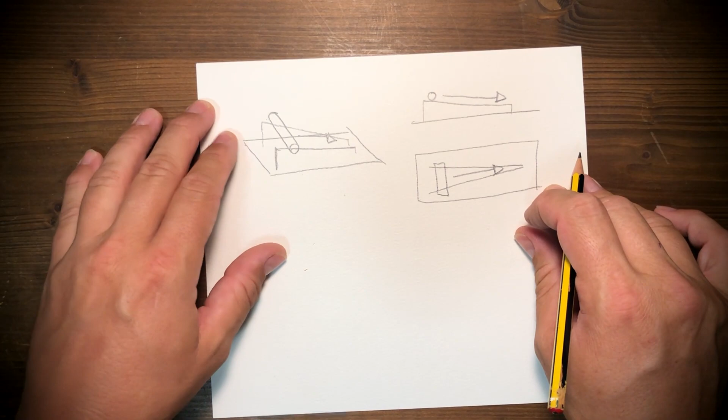The interesting part of these experiments is not when we use a cylinder, but when we compare it to another object, namely an object called a bicone.

A bicone. Now, a bicone is simply a cone which has been placed on top of another cone. It's that simple.

So if we imagine the bicone in place here, it would look something like this. And over here we could imagine it to look like that. And up here, it would probably look something like that.

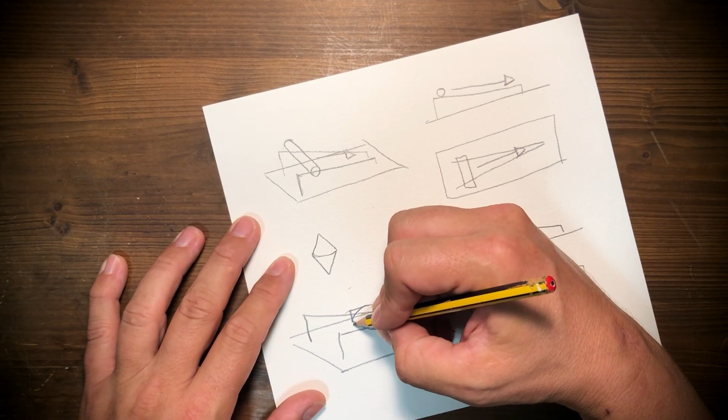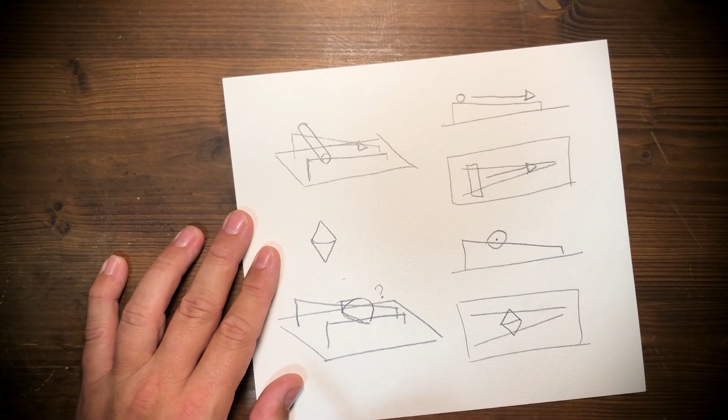Now the question is, what happens when you place the bicone on the rails? We'll come to that later. For the time being, though...

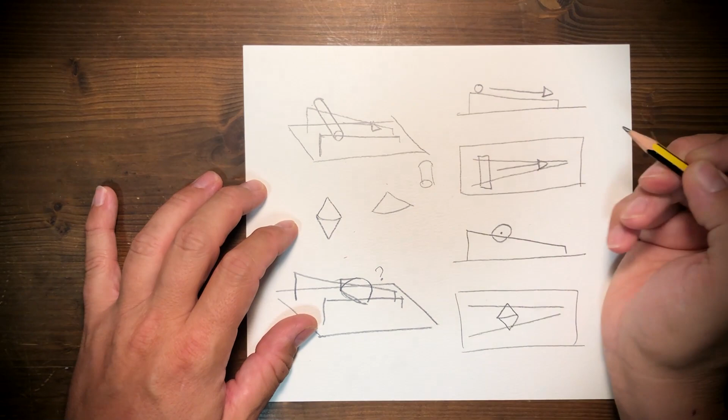Let's get to 3D modeling, and we'll build a very simple cone and a very simple cylinder, and we'll print these off with a 3D printer.

Now, for the cone, we'll have to print it in two parts and then stick them together. The reason for this is that we want to actually print a cone that has quite a wide angle.

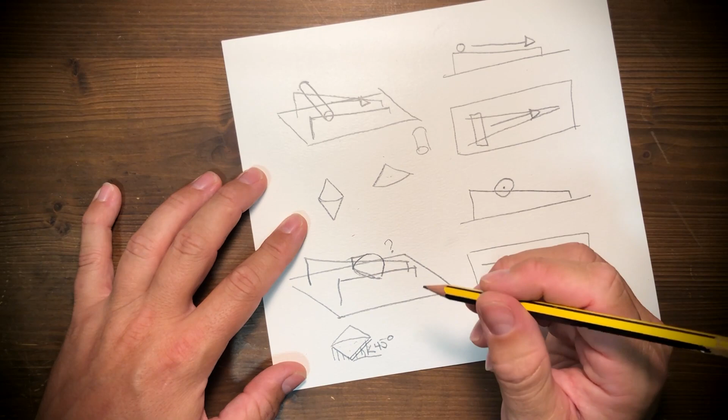And if we try to do that with a 3D printer, and this angle is less than 45 degrees, then the print will most likely fail unless we use support struts. And the support struts will create a slightly uneven surface on the print area, which will potentially ruin our experiment. So we'll print it in two pieces.

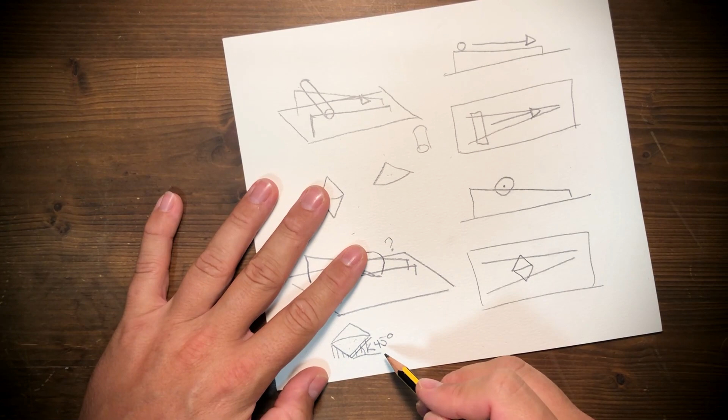The reason why you can't really print less than a 45-degree angle in this way is interesting in and of itself.

If we imagine the cross-section of filaments butting up against each other in a print surface, if you imagine these are lines of plastic that have been deposited by a print head, if you then want to, on the next layer, print an overhang, you need a minimum adherent surface of half of the previous layer. Like that, you can create an overhang that is 45 degrees. If you attempt to print further out, the contact area is so small that the filament will likely not stick, and the print will fall apart, and the whole thing will fail in a mess of PLA noodles.

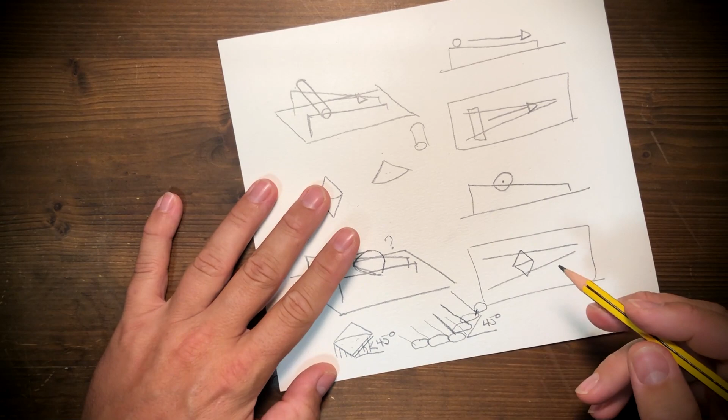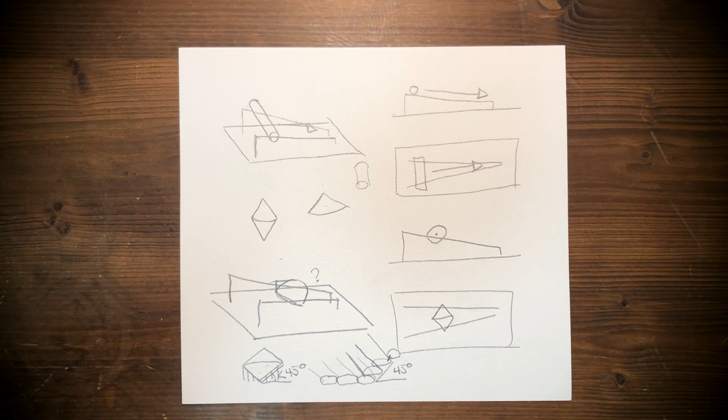So we'll move this into the virtual space now and make a couple of models on the computer. The first thing I'm going to do is, using Fusion 360, make a little sketch of a right-angled triangle.

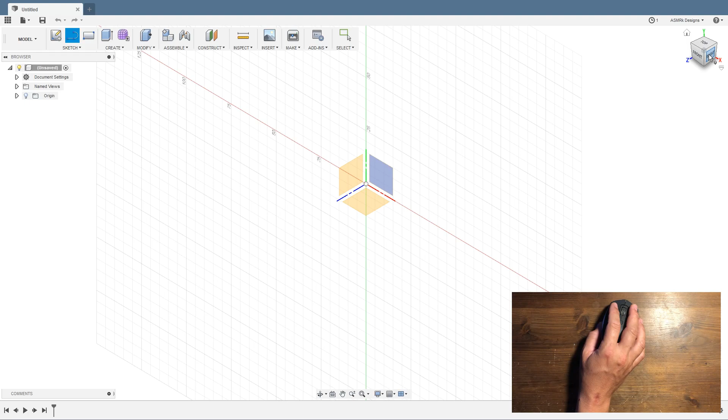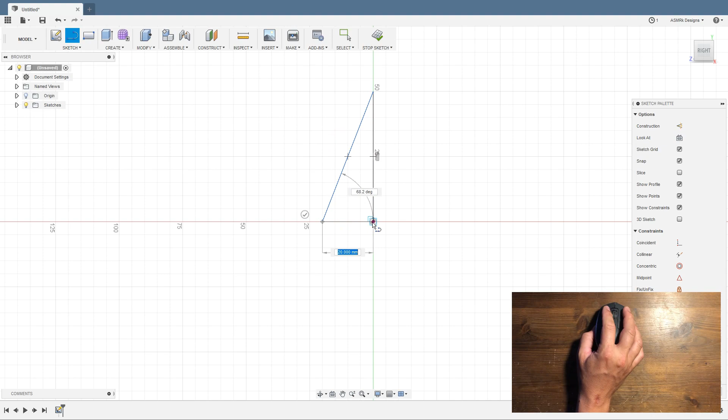We're going to make the sketch on the XZ plane. That'll simplify 3D printing later. So we'll just start by sketching out a very basic shape here. You can see we now have a simple right-angled triangle.

What we'll do now is we'll define some dimensions. We select this side, and our build volume is somewhere in the region of 20 centimeters. As we're actually going to rotate this shape around, we only want this side to be about 10 centimeters, so we'll put in 100 millimeters.

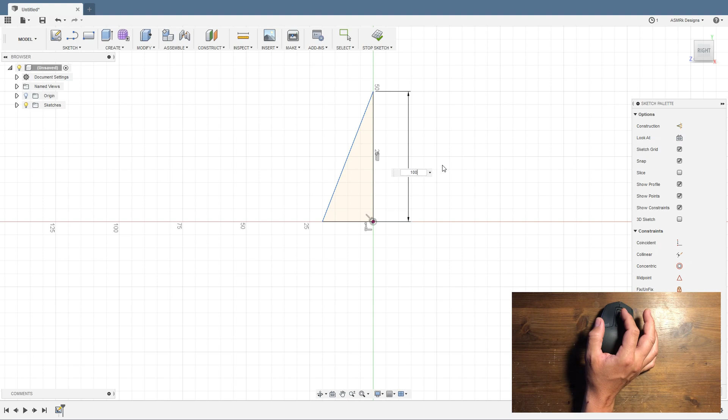We'll also want to define the height of our cone, using this axis here. Now 40 millimeters actually seems like a pretty reasonable size to me. We can always come back and modify that later, so let's just stick to 40 for the time being.

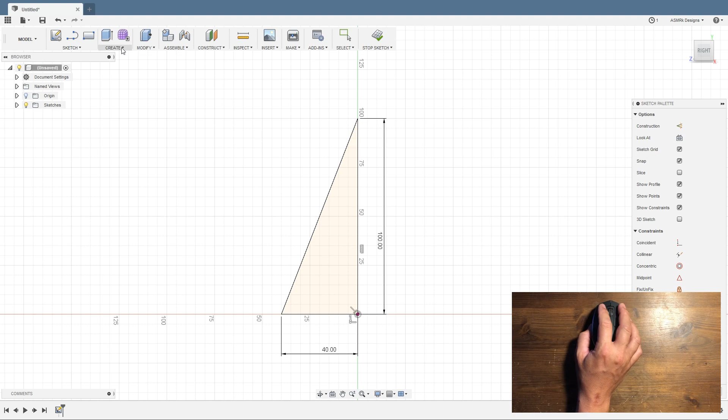Okay, so our basic sketch is complete. We now want to create an object using a revolve. The revolve basically selects a two-dimensional shape and revolves it around an axis to create a three-dimensional shape.

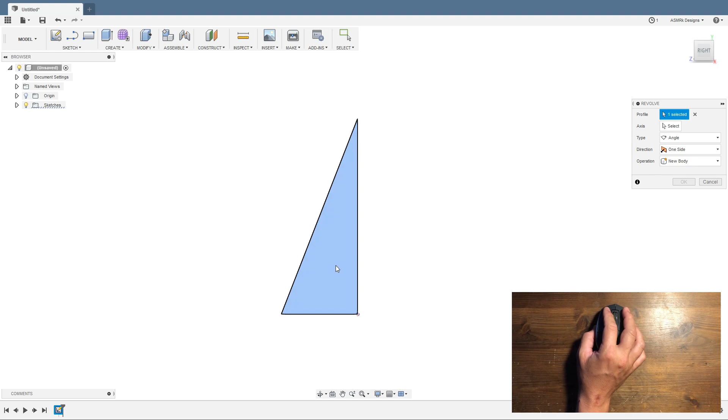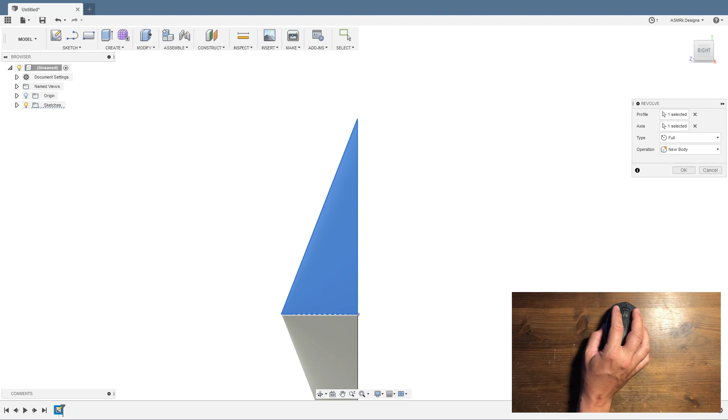So we'll select our triangle, and we'll select this axis, the height of the cone, to revolve it around. We'll do a full revolution, meaning we're going to do a 360-degree revolution around the axis to create one continuous shape. And if I change our angle of view, you'll be able to see we've created a cone.

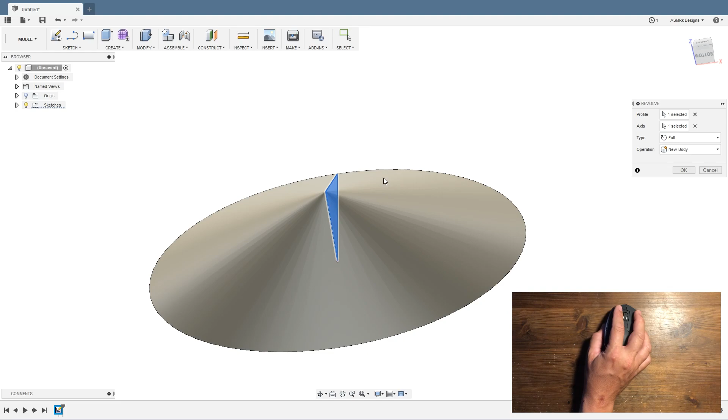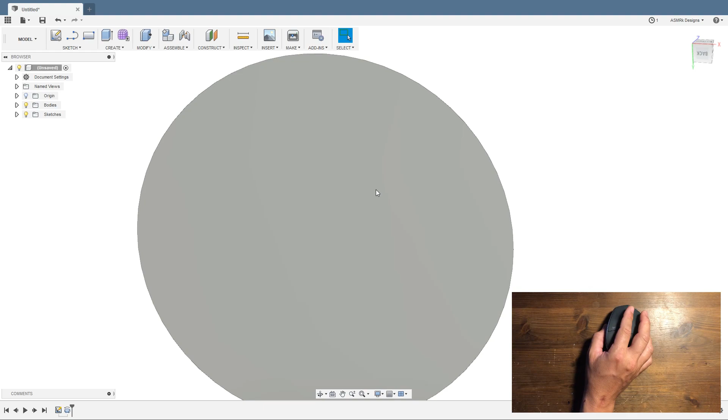Now, it is a very squashed cone, and that is by design. We want this cone to have a very large width, but not too much height. And when we print this off, we'll stick another cone to the bottom. We'll print 2 copies, and that will make the bicone that I'm after.

The next thing I want to build is a cylinder. This is very simple indeed. Before we start, let's save this one.

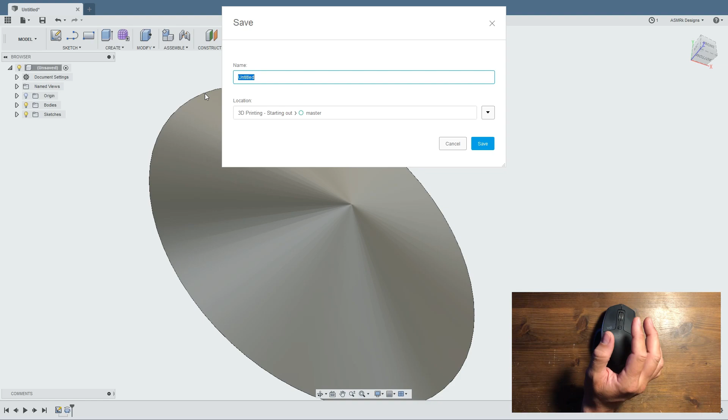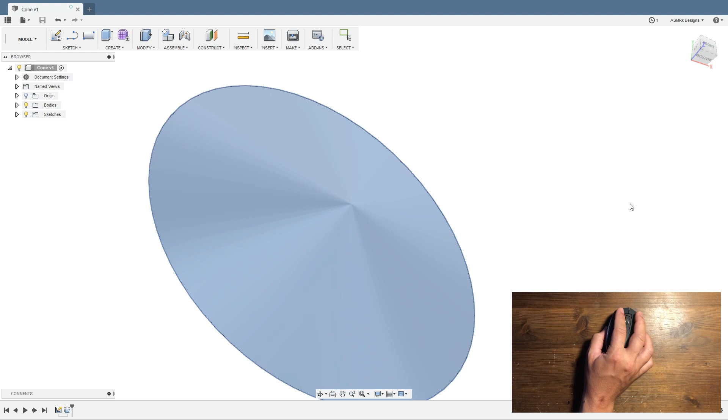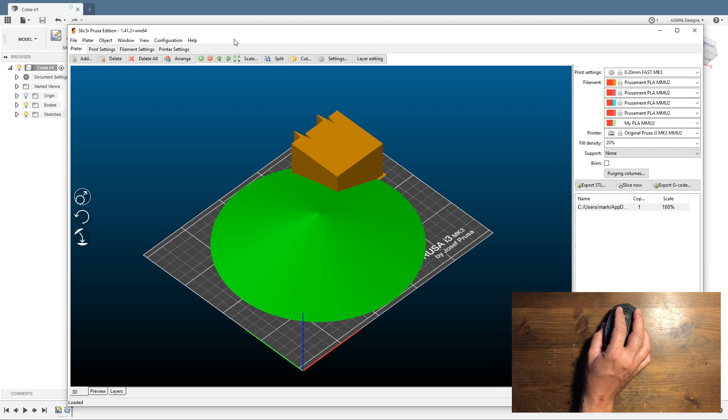And we can export this cone as an STL file for later printing. You can see here, it's automatically opened it in the slicer so that we can print it off. But we'll put that to one side and carry on making our cone.

Now, let's create a new design, and here we're going to make a sketch. This time we're going to make the sketch on the XY axis. Again, this will facilitate printing. And this will be very, very simple indeed. What we'll do, we will draw a circle.

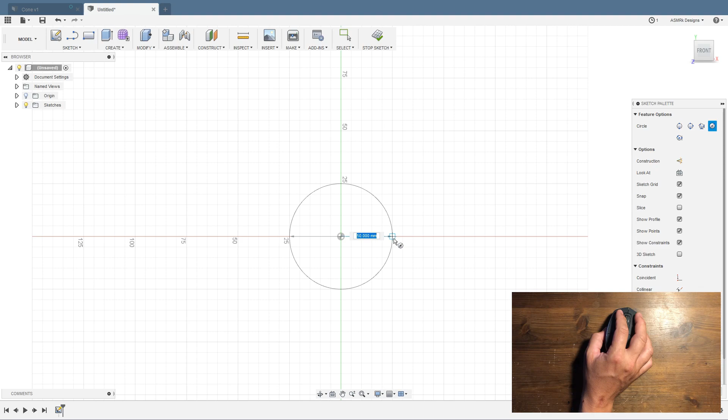And we'll make that circle, I think 50 millimeters is good. It's more than enough. The radius of the circle is not so important. What's more important is the height of the cylinder.

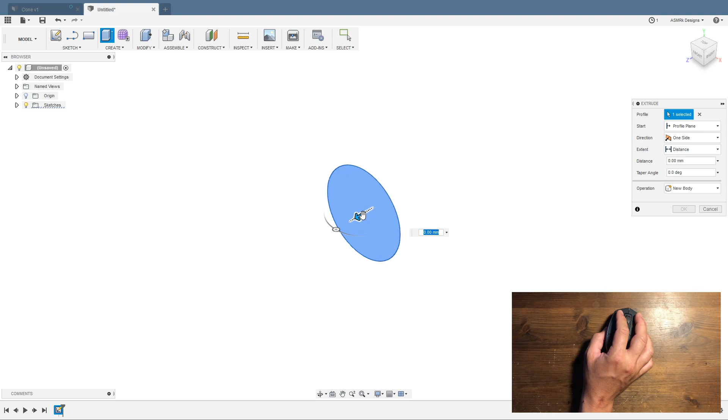So, to create that height, we're simply going to extrude the circle we have made, out in the Z direction. Now, the cone we made before was 4 centimeters high, and because it'll be a bicone, that'll actually make it 8 centimeters high. So we'd want our cylinder to be about 8 centimeters tall as well.

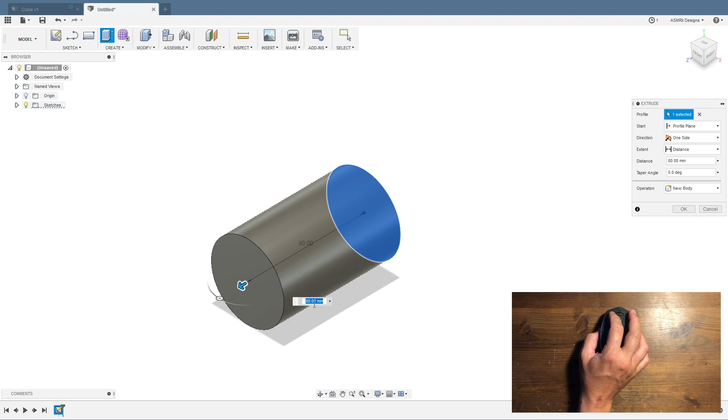And there we have our cylinder. Once again, we can export that and save it as an STL.

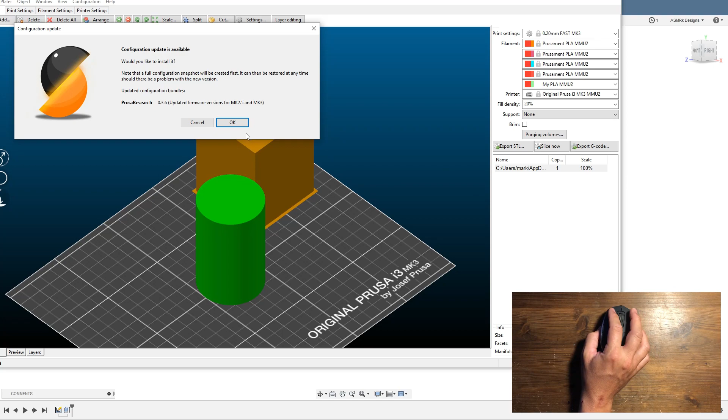An STL file is simply a representation of a parametric model in triangles. So this file here is describing this cone entirely in triangles, and you can see from these small ridges on the surface of the cone that it has in fact been turned from a mathematical model into a representation using discrete quantums.

This object here is actually a wipe tower. It's not something we need to worry about, as that will get moved away. It'll disappear once we send the object to the printer, as we're not printing in multiple filaments.

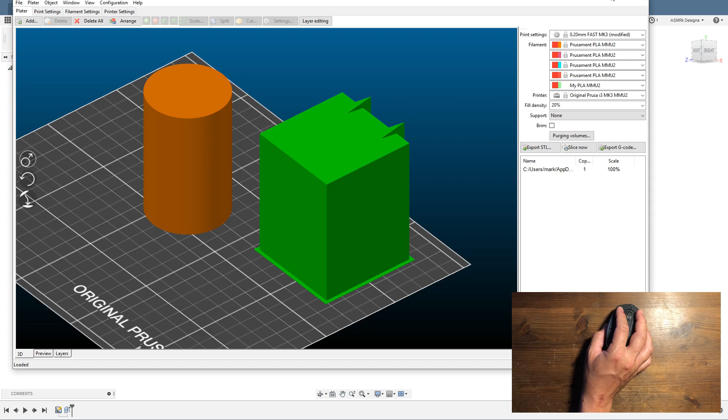Okay, let's put this away and get the print started. And once the print is started, I'll assemble the pieces, and I'll show you how this little toy works.

I quite enjoyed the way that it confuses children who have certain expectations of how things should work. And in fact, it's quite confusing for adults too until you understand the physical principles at work.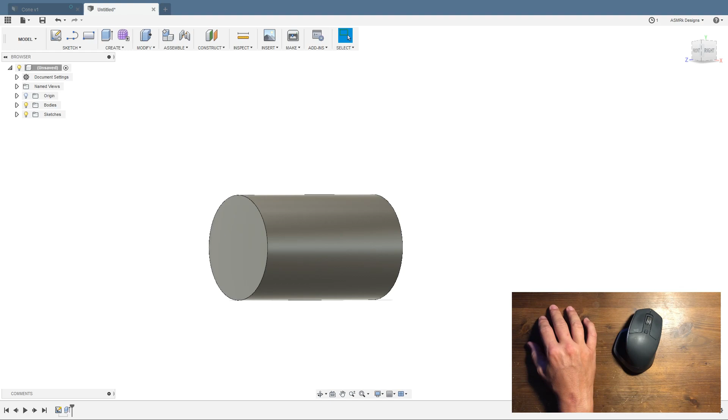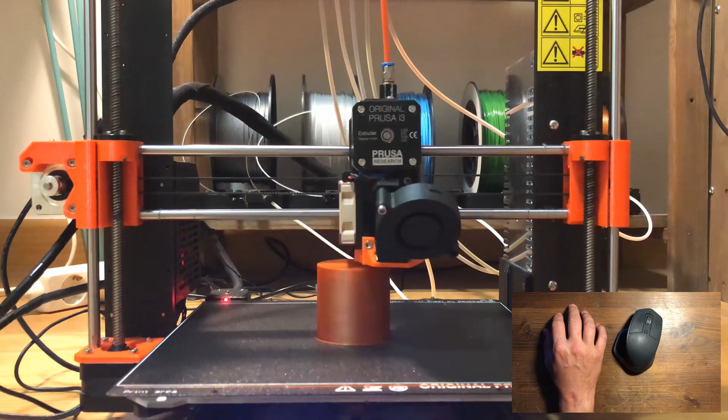So, I'll be back momentarily to reassemble the printed parts. Here we have the printed parts.

I was able to capture a time lapse of the cylinder being printed, but not the cones. The cones were 7-hour prints, which would have been too long. I did attempt to get a time lapse, but it failed on a couple of occasions.

See this lovely textured base. This is thanks to a new print bed that I have installed on my printer, which is powder coated. Gives it this lovely texture, and it improves the adherence of the first layer during the print.

Nevertheless, we have a small defect here, where the filament has become slightly unstuck during the first few layers of print, but it hasn't affected the overall print. That seems just fine.